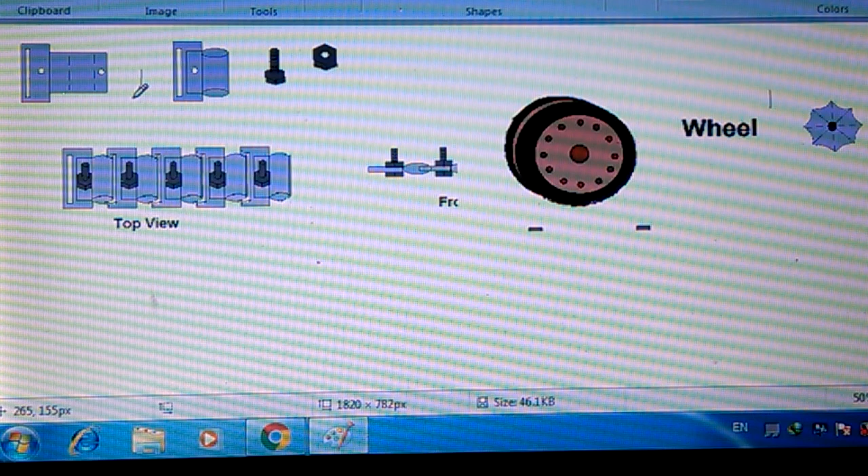This is another design of how to make your RC robot or RC rover or RC tank tracks. This is the same plate you should prepare as I have mentioned in my earlier videos. This is a simpler design.

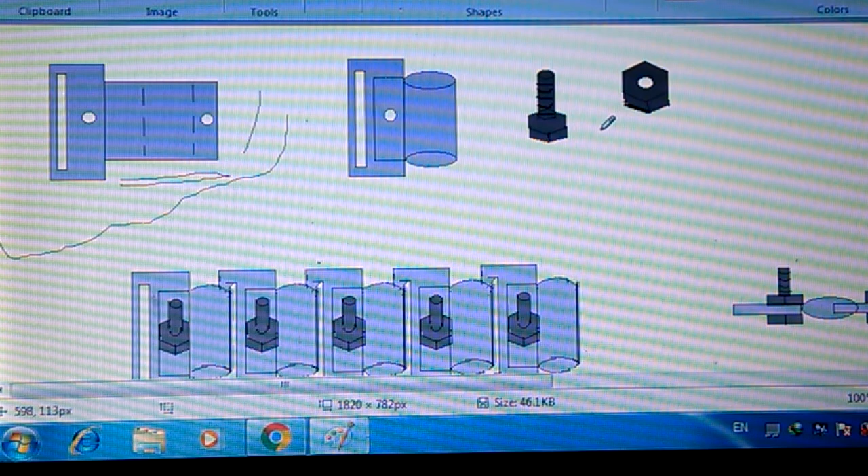All you need is to make this rectangular hole by using a punch or any sharp tool, and these two holes, then you should fold this part to make a ring like this, and you should close it by bolts and nuts. This bolt I suggest to be 4 mm diameter and 1 cm length.

Then you will have this chain. This is a top view of the chain. This is the bolt, and this is the folded ring which we entered inside the hole of the next plate, and this is the next bolt, ring, bolt, ring.

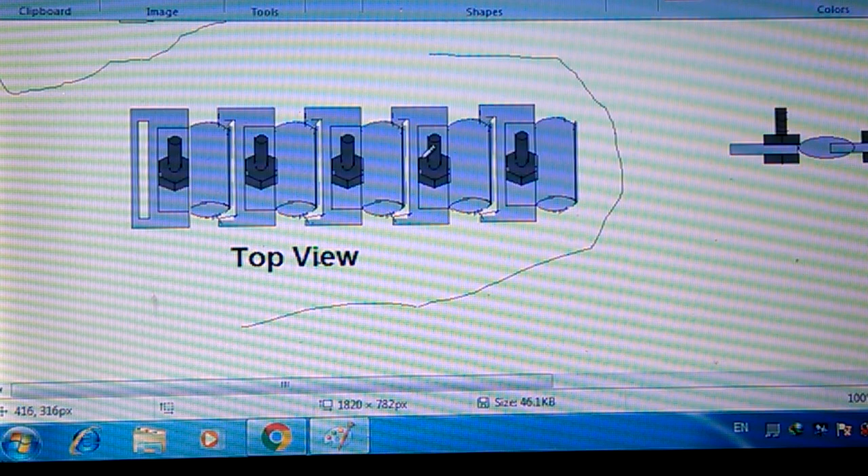The bolts act as teeth to engage with the driver gear, and at the same time act as a guide to the wheels and prevent them from losing their path during the motion of the vehicle.

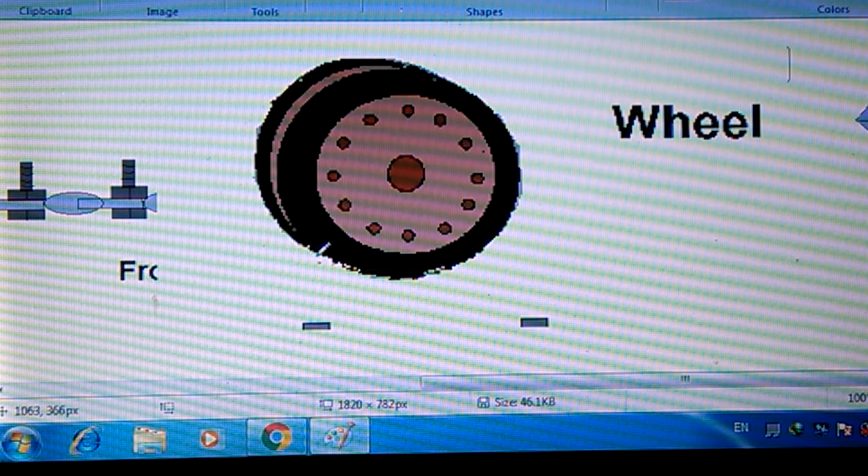The wheel has an intermediate groove, as you see here. This is a grooved ring, and this is the driver gear. The time required to make this design is less than other designs.

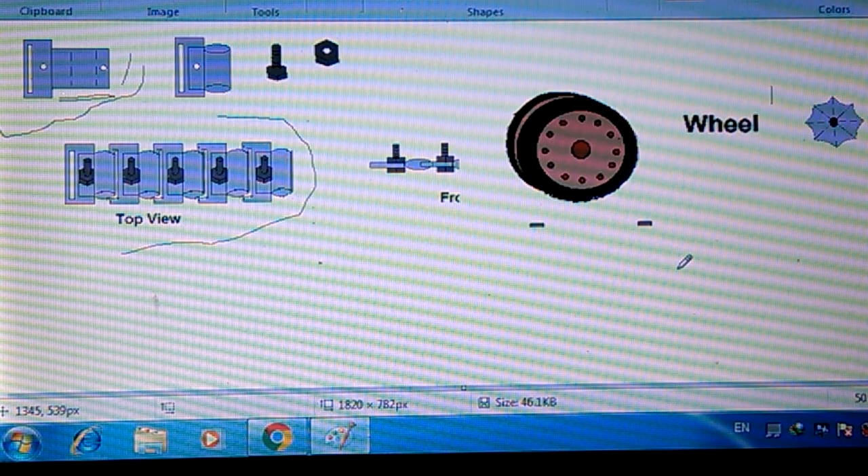The plate, you might get it with a thickness of about 1 mm from a tin plate, such as food tins or another source, and you should fold it in this area, and you will have the beautiful sound of metal cracking and squeezing between these rings and the hole of the next plate, which is very close to the real sound of tank tracks.

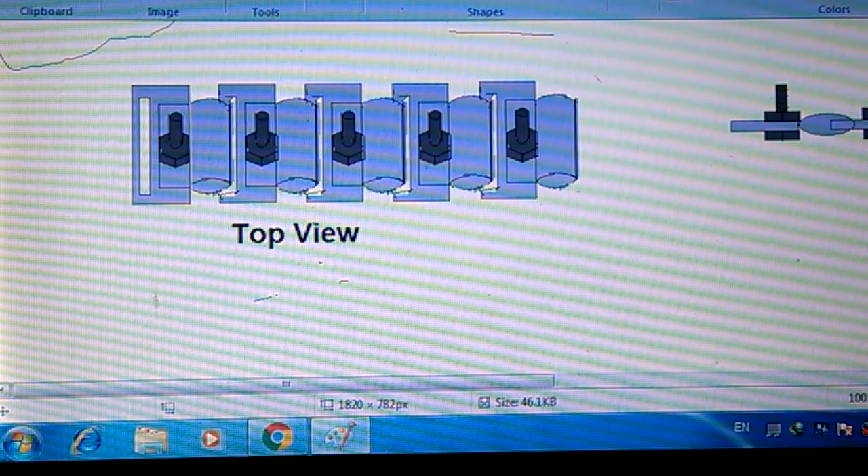This is a front view of the design. As you see here, this is the plate and this is the bolt. The bolt has an upper nut and the lower head of the bolt, and this is the ring, and this is the other plate, and this is the other bolt.

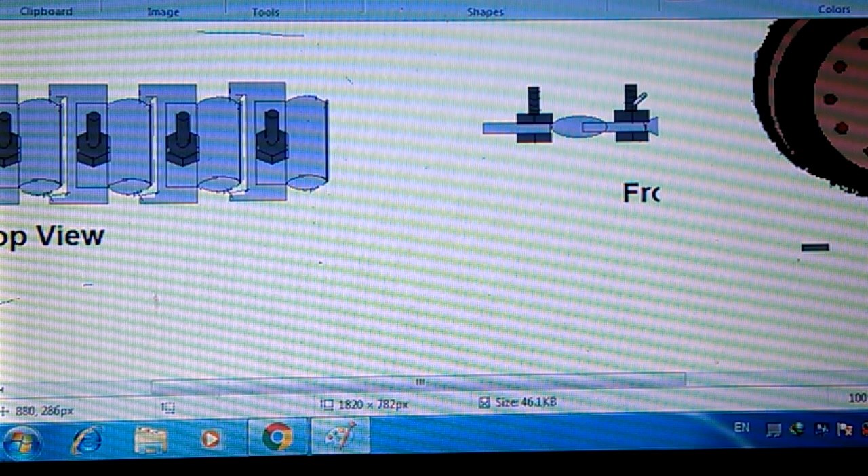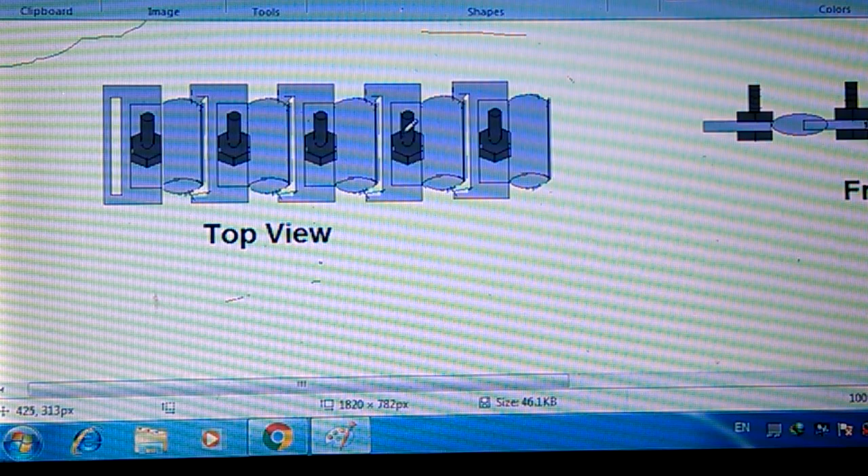This is the top view of the design. The distances between the bolts you can calculate depending on the dimensions of the driver gear.

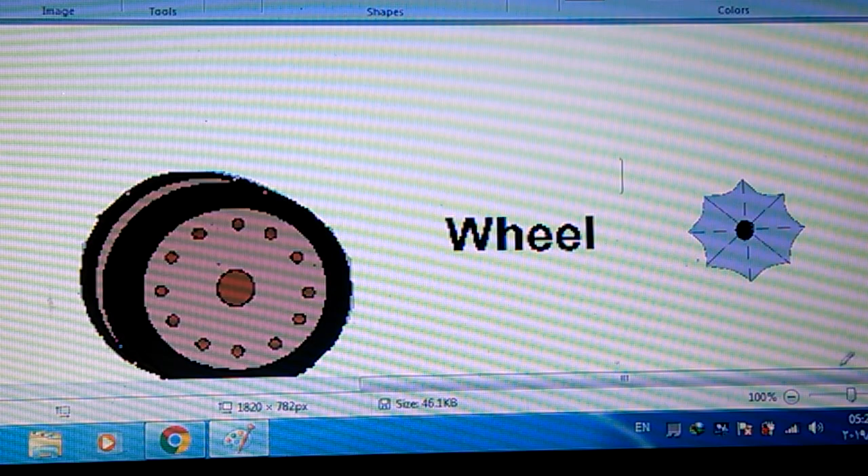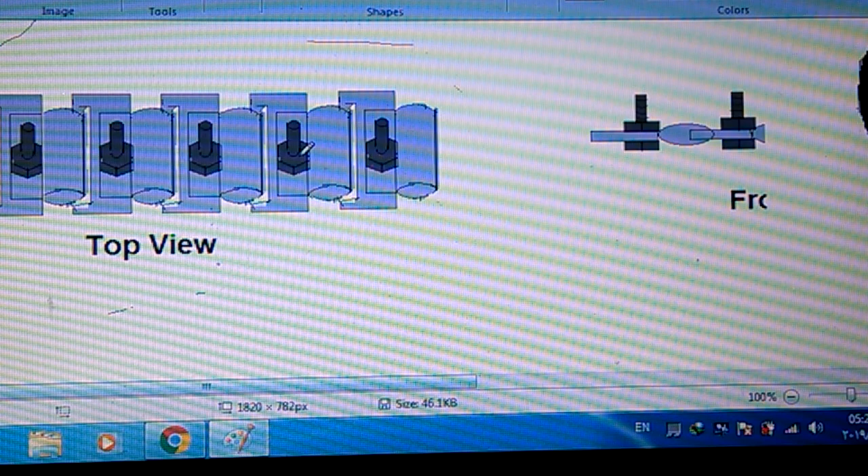You should firstly choose the driver gear with its dimensions, such as the diameter and the circumference and the number of teeth. Then, after calculating the circumference, you should divide it by the number of teeth, then you will get the distance between each two bolts of the chain. Thank you very much.